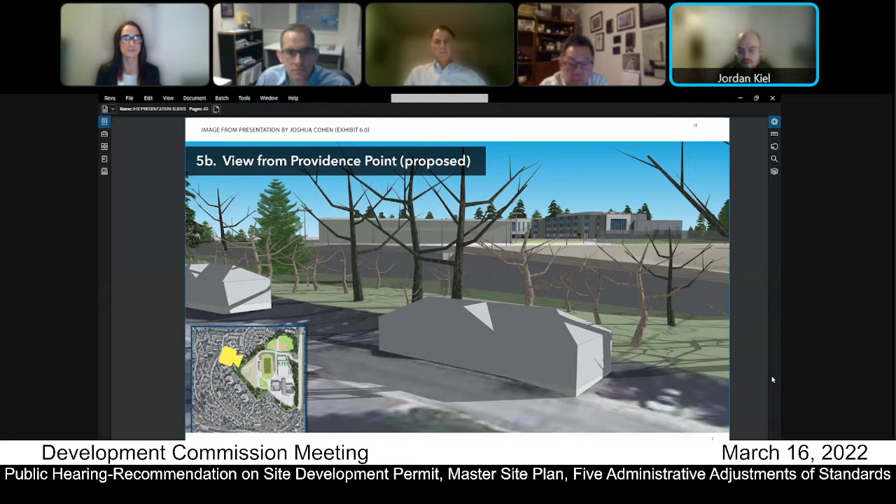Go to the next slide. Moving further west, this is another view provided by Fat Pencil. The view angle appears to be from a drone, definitely not a ground level view. And to my knowledge, there's not a 5-story building in this location.

The next slide. Down on the ground, the view is mostly of Providence Point garages, which lines portions of the northern property line and nearly all of the western property line.

Go to the next slide. Another view by Fat Pencil, shown from a drone and without any of the new trees. We're looking east from the western property line, and notice that building kind of right in the center.

Go to the next slide. So I've actually omitted the building in this view because it would obscure so much of the view of what you're trying to see here. So what you can see is the footprint of the building that I pointed out in the last slide. From this vantage point, you would really pretty much just be seeing the Providence Point's own buildings. But if that were not there, you're seeing all of the new trees that we're proposing along that edge.

Let's go to the next slide. As the new trees grow, the view of the school is nearly completely obscured. The next one.

A view by Fat Pencil, again from a drone and without any of the new trees shown. We're looking north from the southwestern corner of the property. The next one.

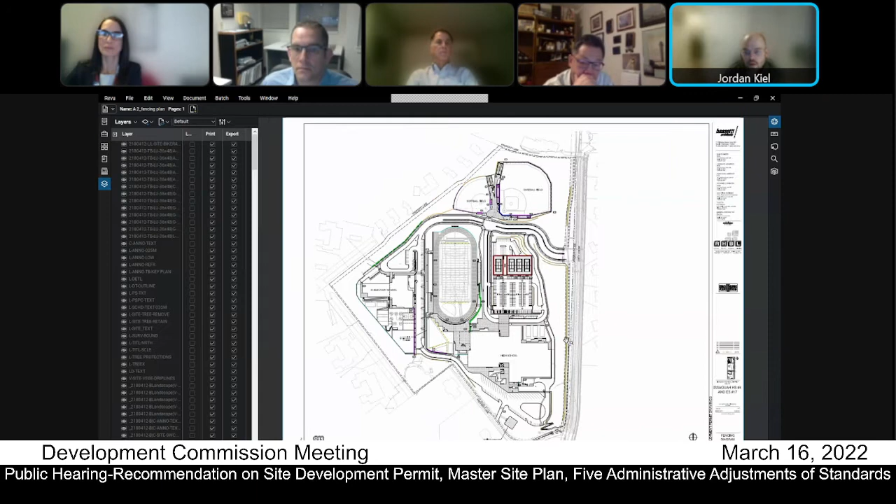Essentially what you'll see when this comes up is that the existing fence along the property line is being retained, and then we have these expansive vegetative buffers, and additional fencing. So the green line around the perimeter here is the existing fence, which will remain. And then we have an additional fence that is 12 foot tall on the school side of that buffer, shown in red, continuing all along.

So we're confident that this fencing will create clear sight lines for students' safety and act in concert with the site design to create logical internal boundaries. As you can see, all foot and vehicle traffic is clearly directed to 228th, versus a suggestion by the PPUA consultant of students filtering through Providence Point and on their way home from school getting into trouble or doing untoward things in the neighborhood. That's simply just not the condition that we're creating on this site.

So in summary, we've gone to great lengths here to be responsive to the concerns of the neighbors and to come up with a compatible design solution. We're really proud of this design and feel that it's meeting all of the needs and concerns that we've heard so far. So thank you. I'll hand it off to Adam Jenkins now to speak a little bit about sound.

Thank you, Jordan. So nice to see you all again. My name is Adam Jenkins. We spoke last time about noise, and I work at the Greenbusch Group. We conducted a noise study for the subject project, and I'm here to follow up on some of the comments that were brought up at the hearing last time, and also address some other items. I understand that our written comment responses were provided to the commission prior to this meeting. As applicant's counsel mentioned before, I'm not going to read them to you, but I will attempt to summarize what I believe are the most important points of those written responses.

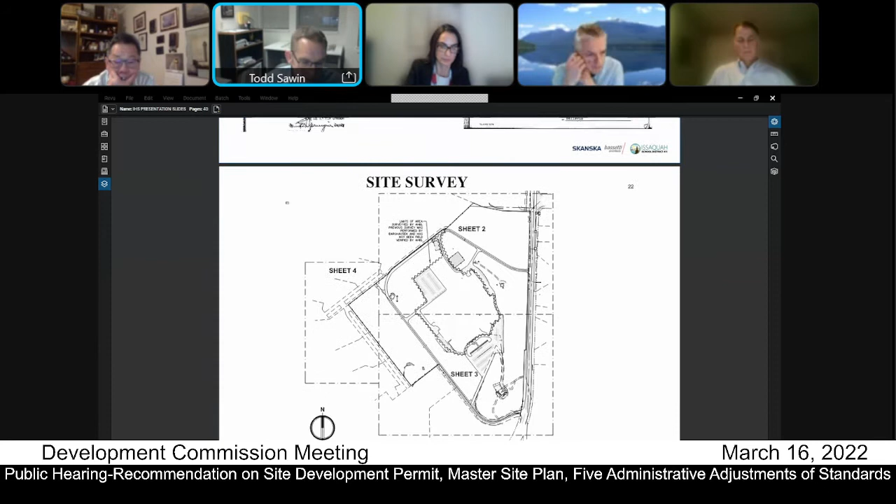So they adjusted the road around the north end of the property to make sure the road was completely within the church property along this side. On the south side, they didn't do that. They left the road in place, leaving the property line to go down the center of the road.

We believe there was an easement put in at the time this property was sold to Hilltop. During that sale, we believe an easement was created. We have not been able to come up with a copy of said easement, and tracing down the deed has been challenging. This is a copy of the Hilltop Village condo map. You can see they have the access road in question shown with access to it, which is why we believe there is an underlying easement we just haven't been able to find yet.

This map is a historical map that shows the access road and the college in place. You can see this is the area that was sold to Hilltop Village. The road is already in place, so we believe there's access rights to that.

The timing of this, we understand, is completely unfortunate, us not being able to find this information out until recently. So we'd like to propose a condition on ourselves as part of the project: option one would be we come up with the agreement, the underlying deed for that easement. Option two would be we provide a new easement with the neighbors to work that out. If we can't come to agreement on those two options, the third would be to move the access road for the school portion entirely onto the school district property so we do not impact the Providence Point property.

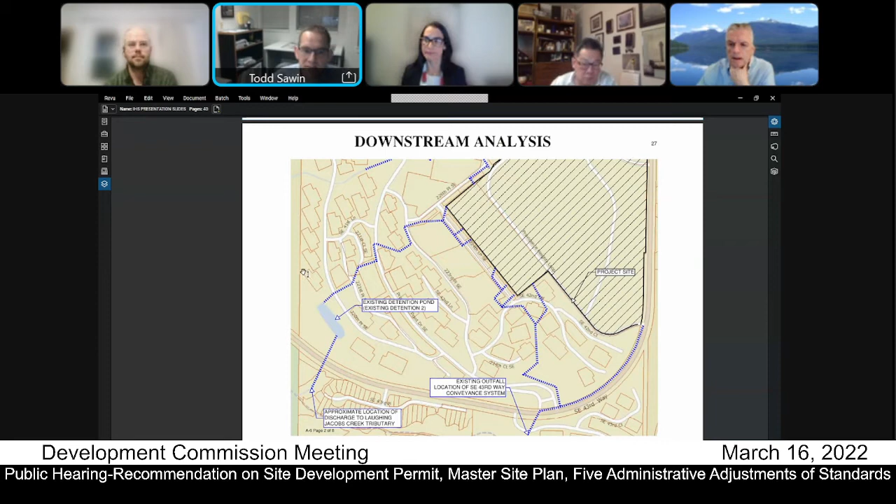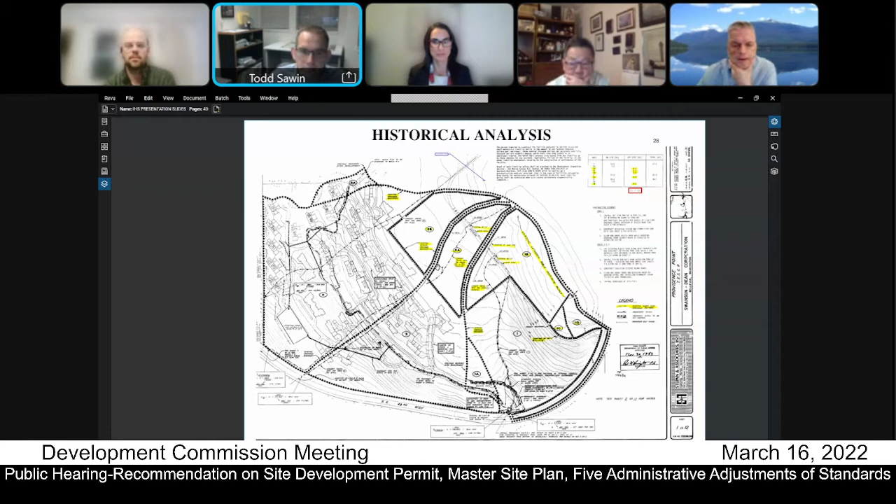There's some smaller basins that sheet flow directly to the neighbors. There's a larger area here that makes its way out to a culvert on the property line that we'll talk about in a minute. And then the majority of the college site that drained in this basin didn't drain directly out to 228th or to the north — it was actually through a system down right here, and there's a piped outfall directly to that.

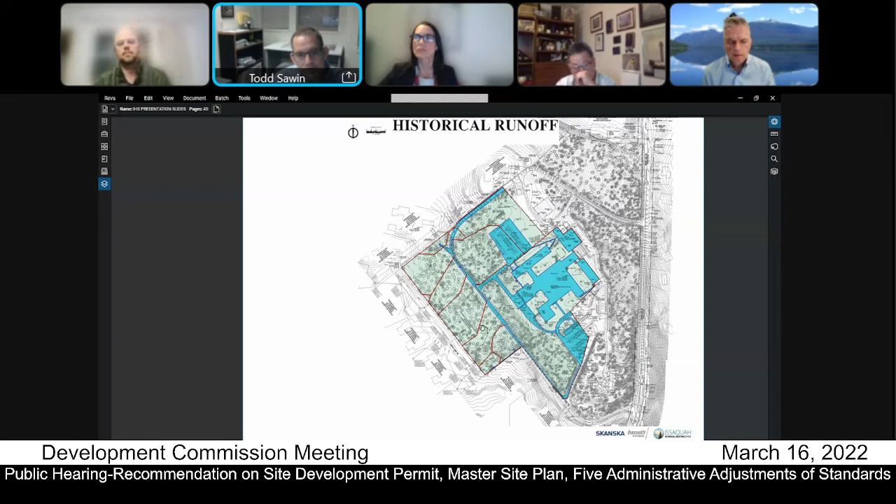As part of our proposed system, we have attempted to match that to the maximum extent feasible. What I mean by that is, all of the buffer area that we're not grading — obviously it's really easy not to change drainage paths from that. We have some area above, the lower area of the elementary school and the parking lot for the elementary school, where getting around the Providence Point system is not practical. It naturally drains that way, and based on the elevations, there's not another place to take it downstream. So we reviewed our options, and there's a catch basin I mentioned on the property line that we're proposing to connect to.

That is where the natural drainage went based on the basin maps that I provided a moment ago. And then the lower portion of the elementary school is going to discharge to a culvert, which was also built as part of the Providence Point system and stubbed onto our property.

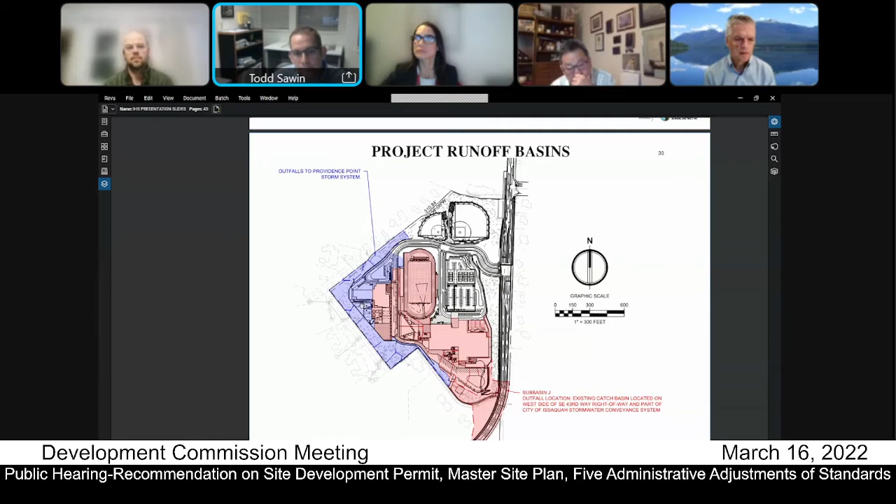It should also be noted that if you did discharge water at this property line and it ran across the parking and over the curb out to this system, it would ultimately make it to the same conveyance system that we're proposing to connect to, approximately 200 feet upstream.

So from last time, we have a number of systems on our site. We have a lower detention system from the elementary school that we're connecting directly to a piped connection. We have the elementary school discharge to that catch basin I've mentioned. And then the red areas we're taking out to 228, trying to get them around the Providence Point system because we're able to do that. In the existing condition, it drains through Providence Point's system and ultimately makes it to the same discharge location. The green makes it to the north and out to the Sammamish downstream we discussed last time.

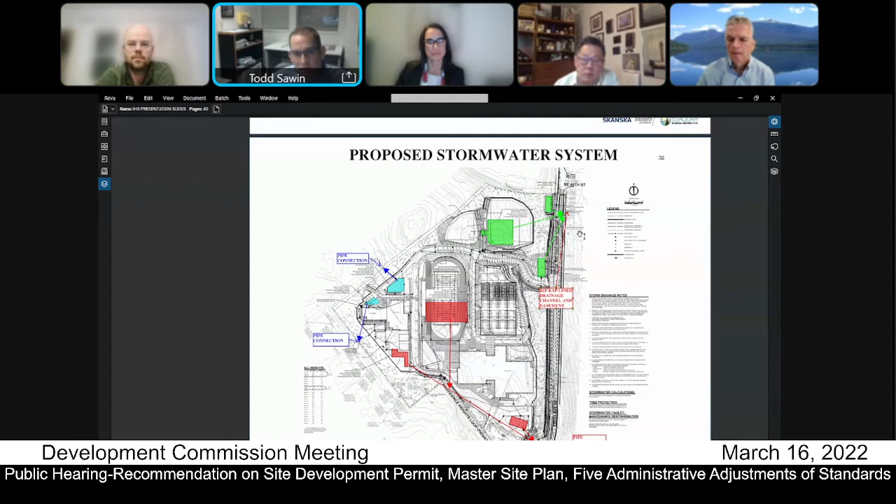Wanted to talk about the downstream and potential erosion a little bit. And this is the slide from last time.

The next piece, going back to forested condition, which is what we're required to do by code, you'll see this is what we'd be allowed to discharge at. And then in the developed condition, we actually reduce that farther by creating detention systems.

So if you imagine having a fire hose and running it down a gravel driveway, you're going to push rocks and sediment out of the way. And if you imagine having a giant tank to hold that volume of water and having a garden hose release, it would have a problem with pushing rocks out of the way, which would be the erosion side of it, but it would run for a long time. That's really the idea behind detention design and what we're trying to do with our site.

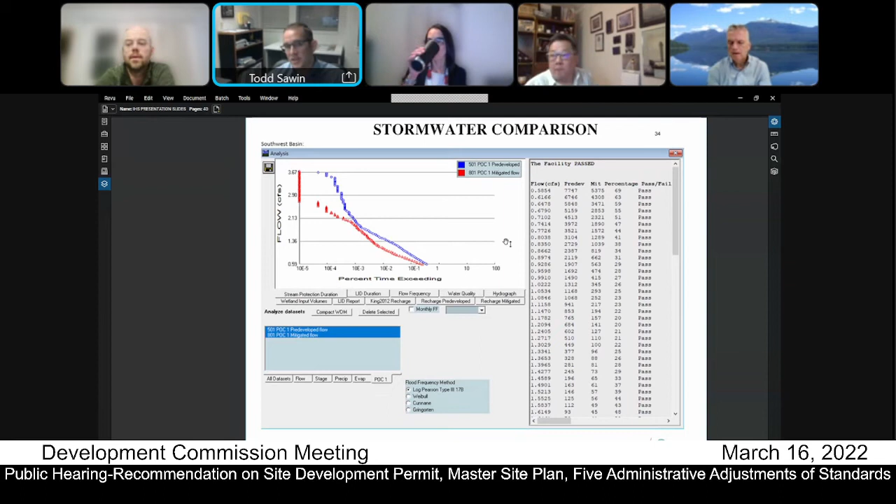The blue line is the pre-developed discharge from the site, and the red is what we're proposing to discharge. This is based on a series that literally takes 50 years of stormwater events in 15-minute time steps, runs it, and then compares your pre-developed amount of times you pass this specific flow to the developed condition. As you can see, we have a net reduction in our system.

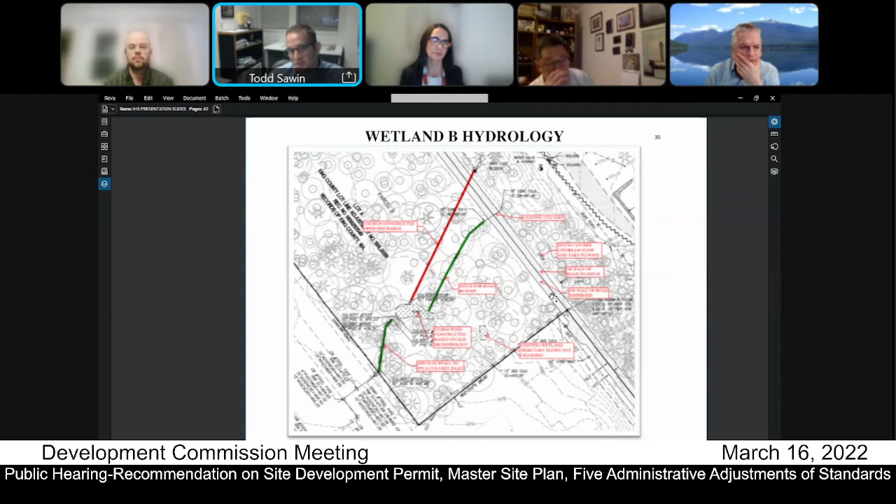So the only area that's actually tributary to the wetland that is not forested conditions is approximately 10 feet of asphalt, the length of this portion. There's not a whole bunch of upstream drainage that makes it to wetland B, and as a result, we're not changing the hydrology of that wetland.

The other thing we heard is about water getting to the trees, and that we're going to dry up the buffer. Again, our site has a significant loop road that goes around it. Other than this portion along the Providence Point area, the majority of it's crowned, which is going to limit the water that makes it out of that area.

We're really trying to capture that water and maintain it on site and discharge it as discussed a couple of slides ago. So the trees are not going to see a reduction in the amount of water they get, because really what they get right now is what falls on them, and that will not change as part of this buffer or this plan.

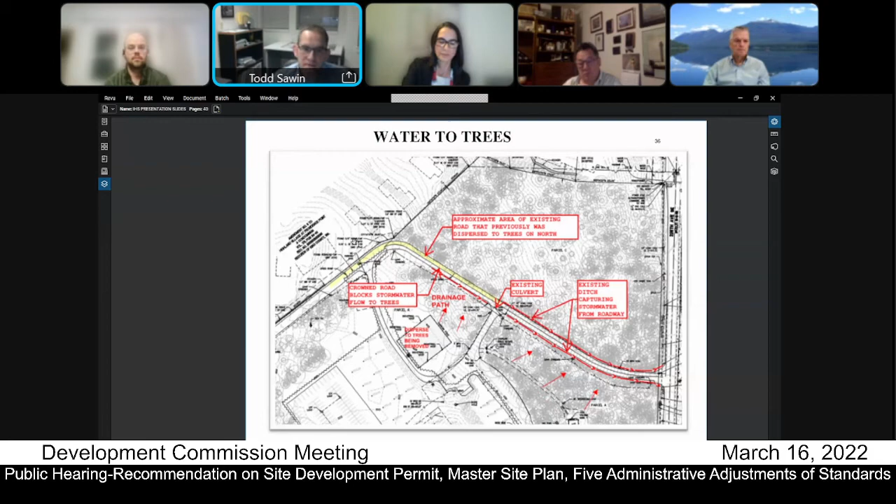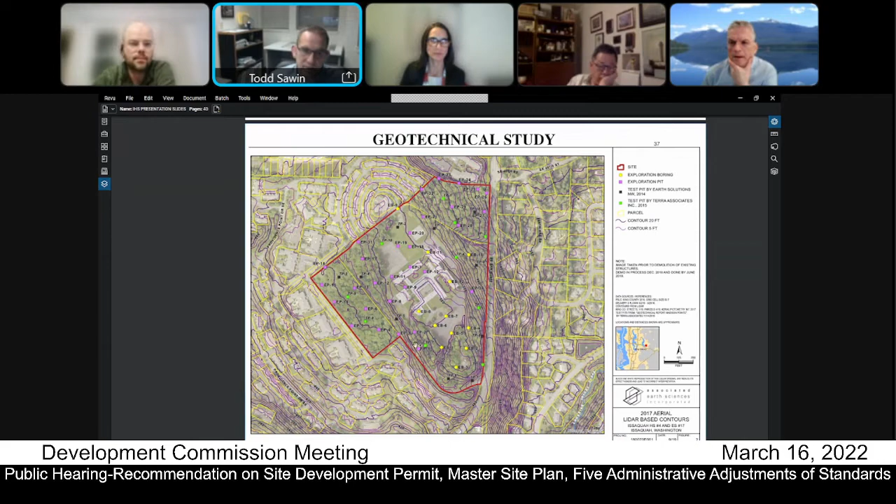So I'm going to turn it over to Marnie Efron to talk about the traffic.

Hello, everyone. I think I'm last up tonight, and I'm going to be pretty short and sweet. I also have a set of rebuttal comments that have come back as Exhibit C. We've also attached two pieces of supplemental information that were part of the SEPA record and have been performed in coordination with the City of Sammamish related to traffic and transportation. Those have been attached to my memoranda as Exhibit C1 and C2, and I'll talk briefly about those in my comments here.

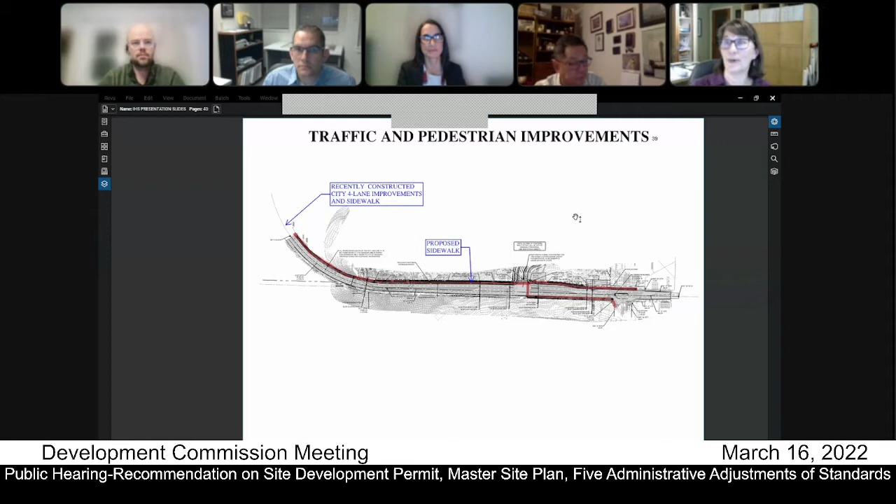Back to Todd. Thank you, Marnie. I want to thank the Development Commission for listening to our presentation and working with us through this process. I want to point back to the written materials we provided—there's a lot in this record. We're happy to answer any questions you have, but really appreciate your time and look forward to a really successful project.

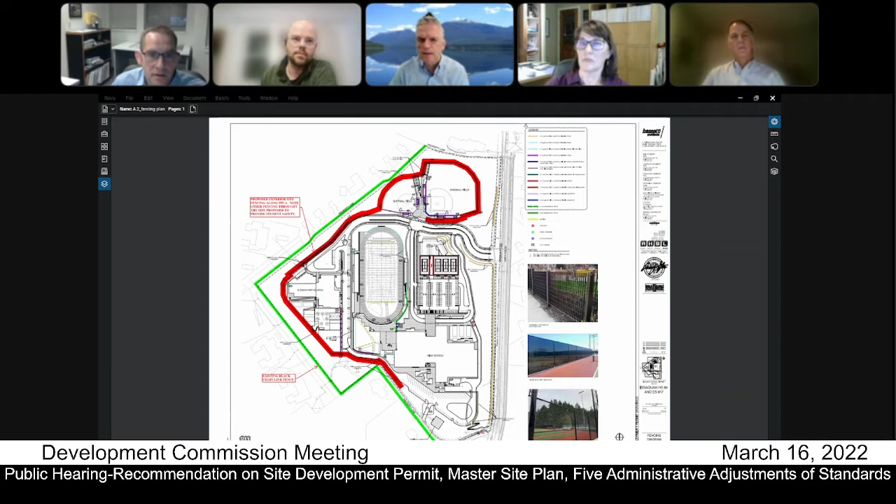He continued that the portion along the elementary school wall is 6 feet. Commissioner Morgan asked about a green or yellowish colored section, and was told that area is 6 feet, while along the walking path marked with a dark black line it's 4 feet.

Commissioner Morgan thanked him for clarifying. He continued explaining that the fence is 8 feet along the elementary school playground area, and 4 feet near the wetland to keep people from falling in.

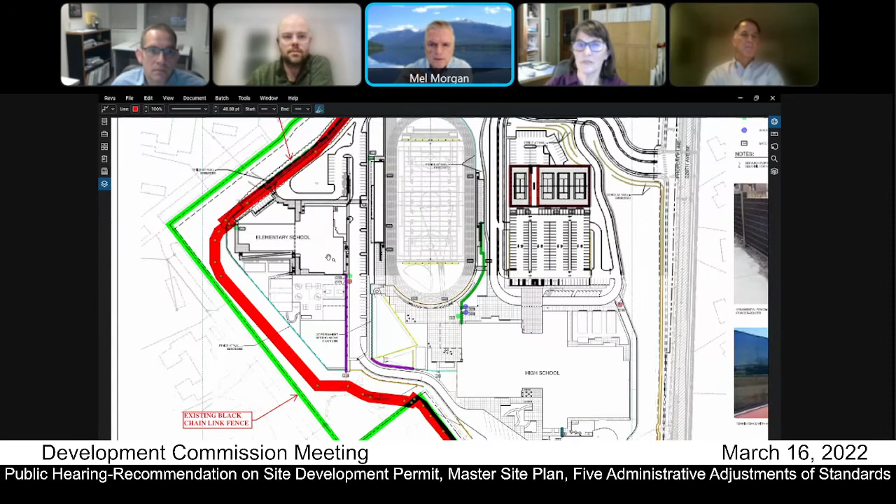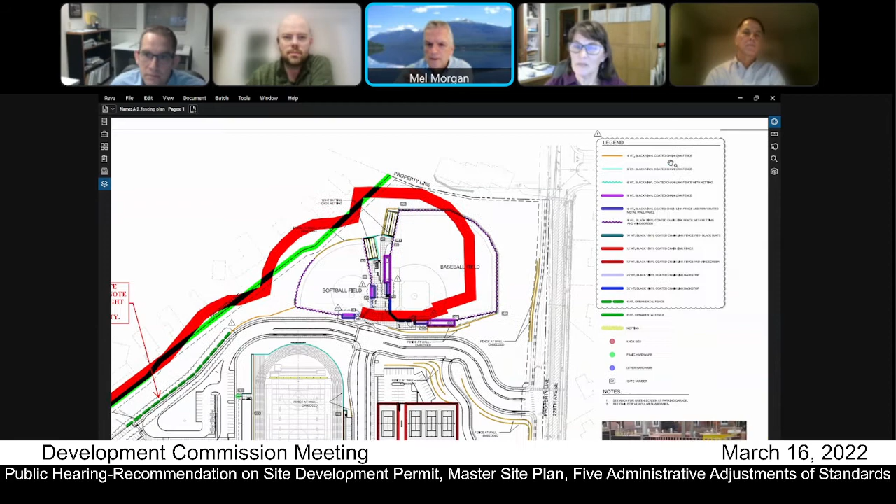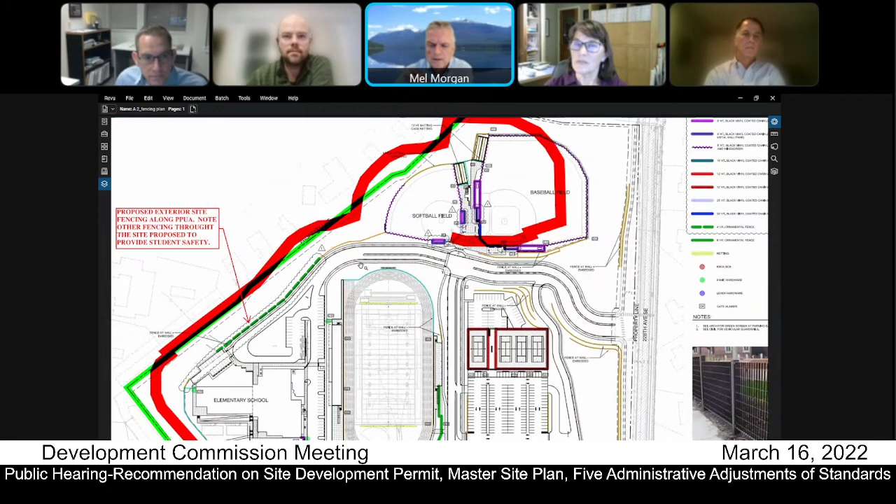Commissioner Morgan asked him to move the red line off the map, noting that at the north end of the football field, the gold color between the green dash line and the softball field appeared to line up with a 4-foot high black vinyl chain link fence rather than 6 feet. He confirmed this was correct, and she asked if it was possible to make that a taller fence than just 4 feet.

He explained the intent was that people would be walking on a sidewalk next to this fence, so keeping the scale down was part of the reasoning, but said a 6-foot fence wouldn't be a problem from the district's standpoint if the commission wanted that.

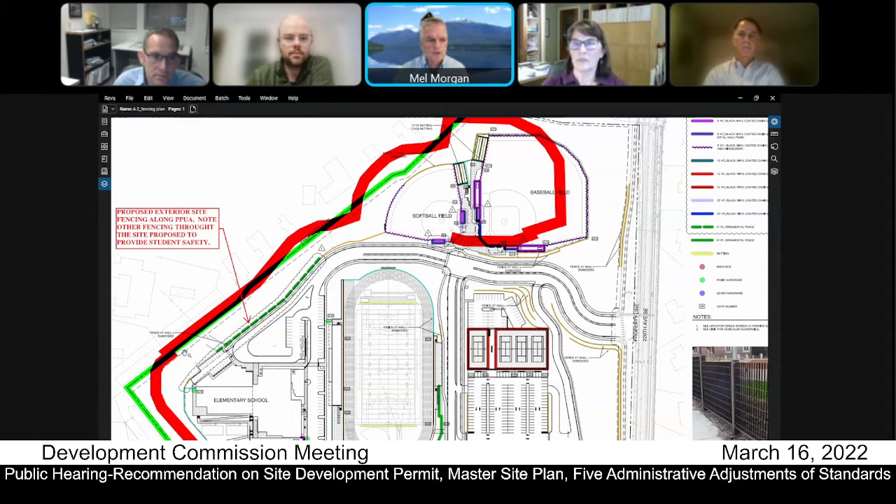Commissioner Morgan asked one more fence question about the very south end, where the fence ends in the middle of the area, asking why it stopped there instead of extending down to the new access road.

He explained there's a cluster of trees there, so tying the fence into those trees was the thought, since students weren't expected to pass through there, just getting off the bus and going into the school, so there wasn't a security need for fencing. He noted this is a preliminary fencing diagram that will be refined during construction.

Commissioner Morgan noted there's an outside plaza on the backside of the school and asked if the fence could be extended to the access road, perhaps along the edge of the parking areas rather than through the trees, as a visual barrier. He agreed they could definitely do that, and she thanked him.

The chair asked if there were other questions from the commission or the applicant.

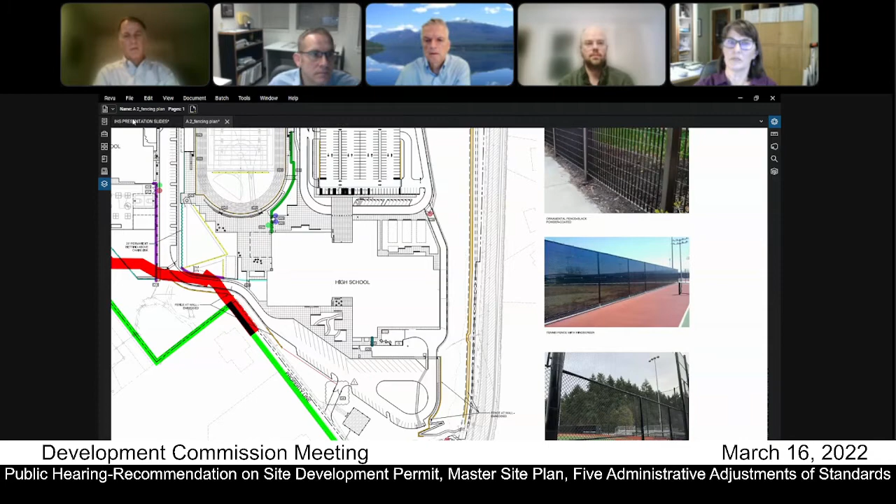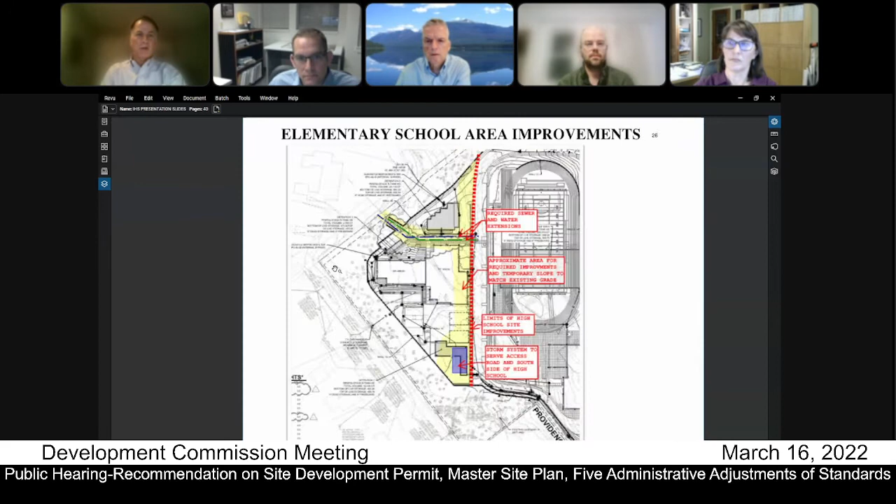A commissioner asked to revisit the access road and easement discussion, admitting confusion about an additional condition that had been suggested, and requested the presenter pull it back up and walk through it again, including the options discussed regarding the original easement documentation showing the assumed appropriate alignment of the roadway, historically shown on some provided documents and photographs.

The other option was to come to an agreement with the neighboring property owners at Providence Point. The third option was to move the road onto the high school site. I'm guessing you've already done fairly exhaustive research, so you may not be able to accomplish number one. Providence Point obviously could be a protracted negotiation. So then the last option would be realigning the road.

My concern is, can you accomplish that on the property and still meet the conditions? Does it have a negative effect on the ability to comply with the city code standards and the buffers we're trying to accomplish here? So if you could spend a few minutes walking us through, specifically on that last option, since it hasn't been fully explored here, how would you accomplish that?

Yeah, so maybe to back up just a tiny bit from the last option first. This deed that showed this has been reserved is something we got this afternoon, honestly. We've been doing some pretty exhaustive research with Chicago Title, but it's something they did not have in their original title report. So I do believe we're going to find the underlying easement. I have a hard time believing the underlying church or the college sold that property without the existing road being allowed to be there. So I think there's a pretty good likelihood we're going to find that in the next few days.

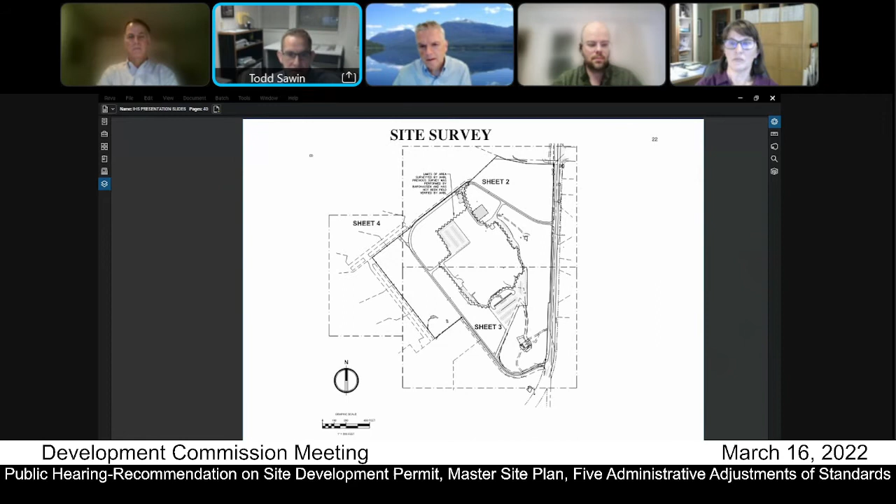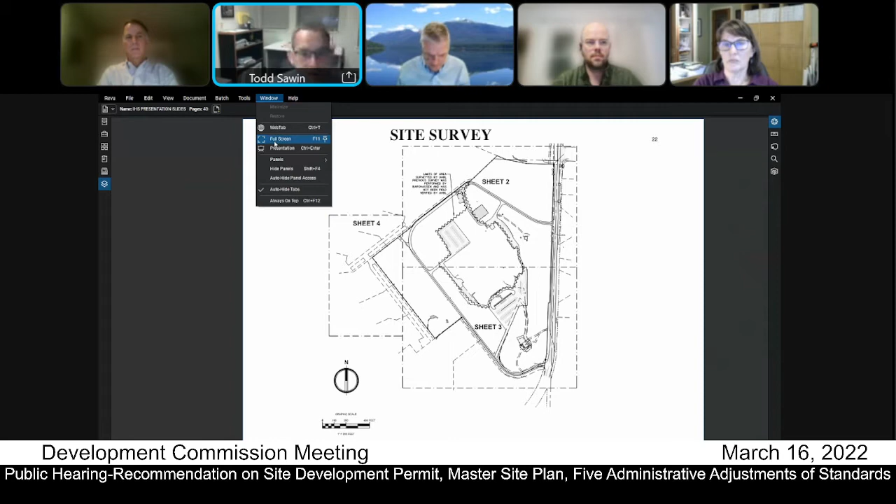If we don't, we do have to go down the path of rebuilding that. My thought is, if we go from this site survey and see if I can zoom in. Sorry, this wonderful presentation mode makes it relatively difficult to actually... see if this works. Okay.

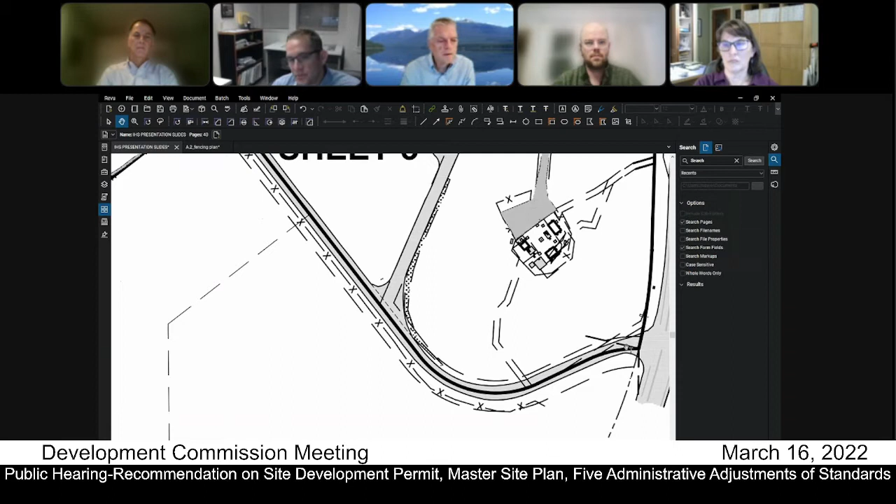Here we go. So the access road is not exactly on the property line. My thought is we would leave the portion of the access road on the neighbor's property. Obviously, if we don't have rights to it, we're not going to touch it. We would add asphalt on our portion of the road in order to get a 20-foot wide access to our site. Right here, there's only about 6 feet of the existing access that's on the Providence Point side of the property line, so we would add a little bit here.

It would definitely take some retaining wall, but that area was previously cleared. There's actually a sign and some things that sit kind of on this hillside and a light. So there's no trees, so I think we could pretty easily do that, add to get away from 228th, and then same idea, add somewhere between 8 and 12 feet of new impervious asphalt to create that road that would go up. It's something I think we can completely do without impacting trees and buffers and all the things we've talked about as part of this project.

I don't think it adversely changes our proposed development that we've submitted for or causes any other issues, specifically because that road is going to be used for emergency vehicle access only. The district isn't proposing to have vehicles on it as part of their project. So what you're saying is you're confident you could accomplish the widening without materially impacting the project or meeting the standards we're trying to achieve here. Yes, I 100% believe that is true. Okay, thank you.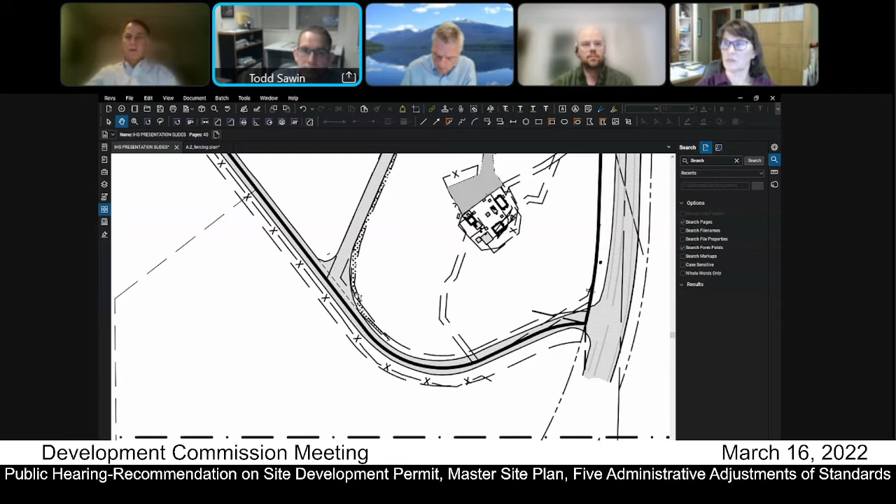Commissioner Arcata. Thank you, Chair Brennan. This is Johnny. I have a question that may be premature, but there's been a lot of discussion about trees and buffer zones. Has there been any consideration for an establishment period for construction? In other words, plant the trees, and then if there are any failing trees after a certain period of time, they're replaced. That may help with some of the consideration for trees.

Yeah, there has been. We've got a condition that's part of the Issaquah Municipal Code that we're going to plant trees and monitor them for 3 years. The other thing I missed pointing out is we're going to provide irrigation on those trees. We need temporary irrigation, including what we're providing in the buffer, to make sure they get established and we end up with the beautiful graphics that Jordan provided, making sure this looks the way we intend it to. I think we all want that buffer to grow as quickly as possible and create this forest-like atmosphere for the students and for the neighbors. And a different question.

This is during construction, you're gonna have a large excavation for your stormwater retention at the ball field. I assume there'll be multiple stages of construction stormwater control that'll mitigate turbidity, silt, any contaminations. Yeah, we will definitely have an NPDES permit, an erosion permit with the state of Washington that will monitor discharge and make sure we're not allowing turbid water to leave our site.